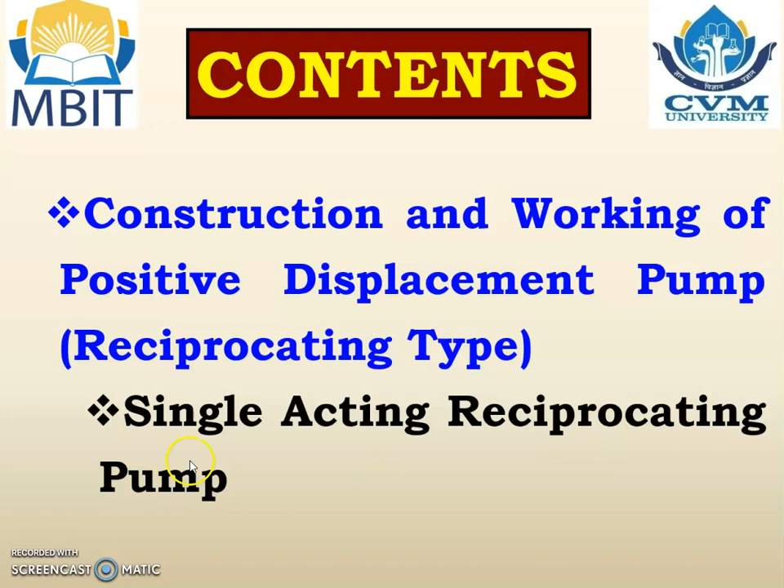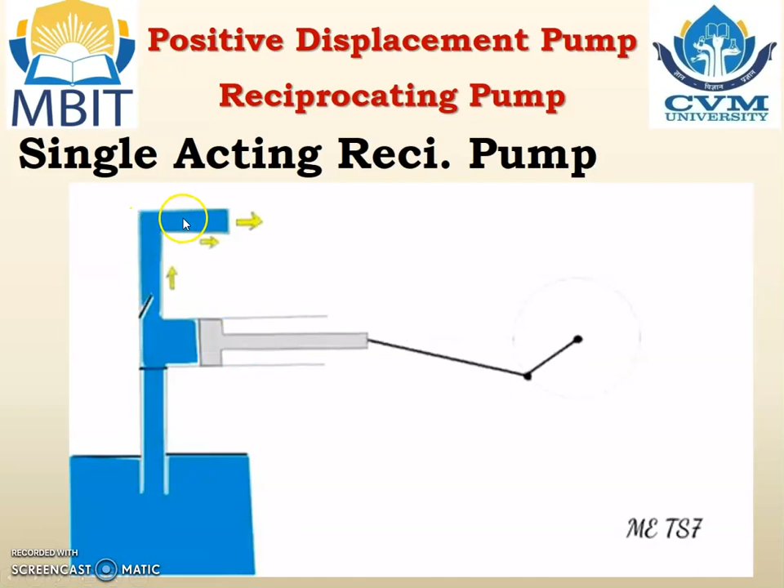Before we study the single acting reciprocating pump, let us study the animations on the single acting reciprocating pumps. Here you can see the piston moves from left hand side to right hand side. During that time, water is lifted up to the piston, and when the piston moves back from right hand side to left hand side, the water lifted or available in the cylinder is now lifted to the overhead tank.

The same animation is here. When the piston moves from right hand side to left hand side, water is lifted up to the cylinder level, and when the piston moves from left hand side to right hand side, the water is lifted from the cylinder level to the discharge level.

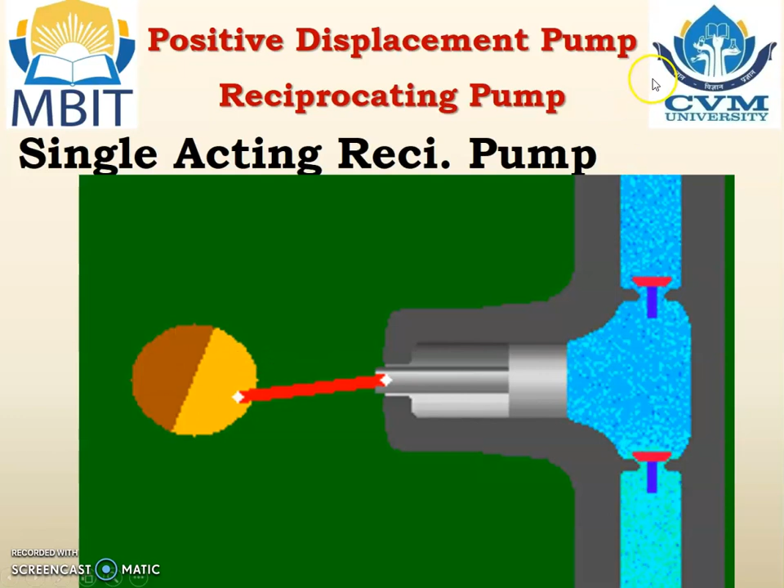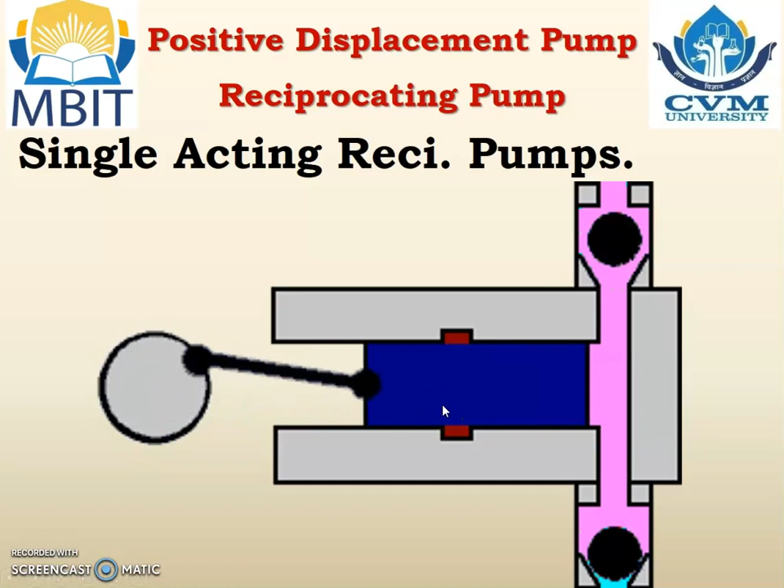This is another animation. Water is sucked and then water is lifted. This is another animation we can see. So in all these animations we can see there is a reciprocating motion, and so it is known as the reciprocating type pump.

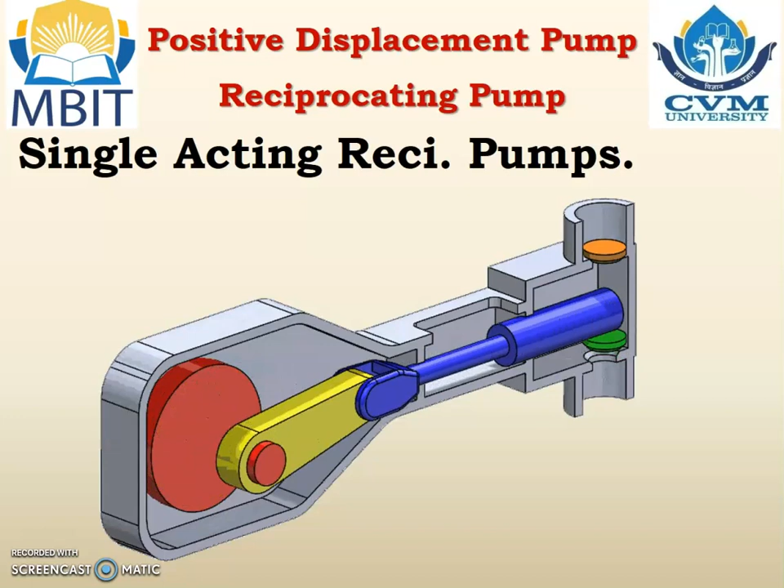This is another animation, and this is the figure which you are required to draw if they ask you in the examination.

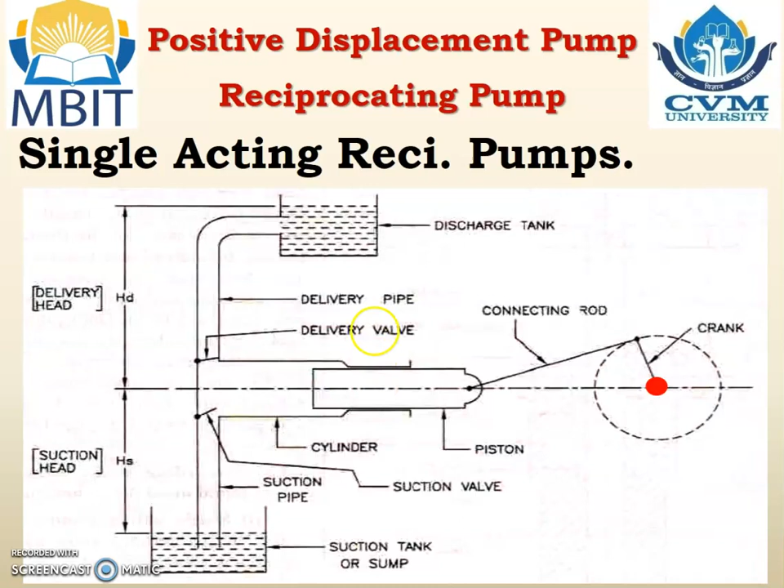So now let us see the different parts of the single acting reciprocating pump and its working. Construction: it contains a fixed cylinder in which the piston reciprocates. This one is the fixed cylinder in which the piston reciprocates.

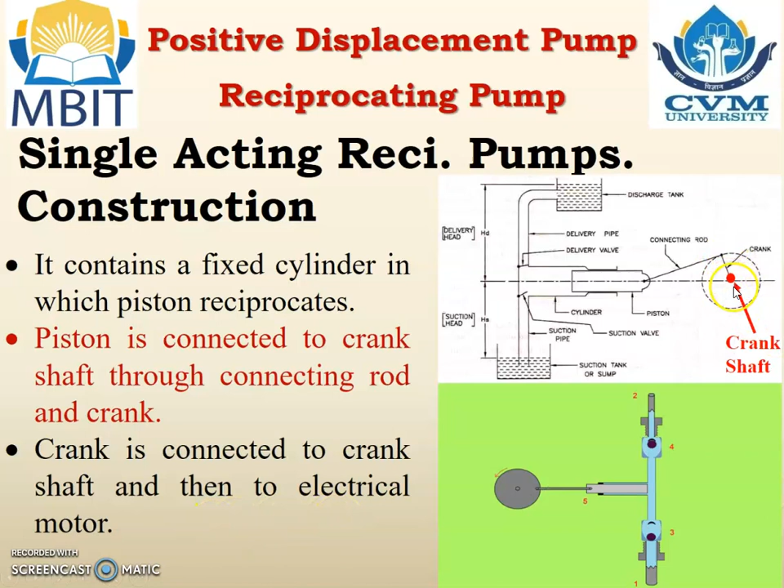The piston is connected to the crankshaft through the connecting rod and crank. So this piston is connected to the connecting rod, then to the crank, and then to the crankshaft. Crank is connected to the crankshaft and then to the electric motor, meaning crankshaft is connected to the electric motor.

The suction pipe connects the cylinder with the sump, and the discharge pipe connects the cylinder with the overhead tank. So this one is the suction pipe, connecting the sump level with the cylinder level, and this is the discharge pipe or delivery pipe, connected between the cylinder and the discharge tank or overhead tank.

The suction valve and discharge valve are located in the suction pipe and discharge pipe respectively. Here is the suction valve located in the suction pipe, and this is the discharge valve located in the discharge pipe. Both valves are one-way valves, meaning non-return valves which allow the flow of liquid in one direction only.

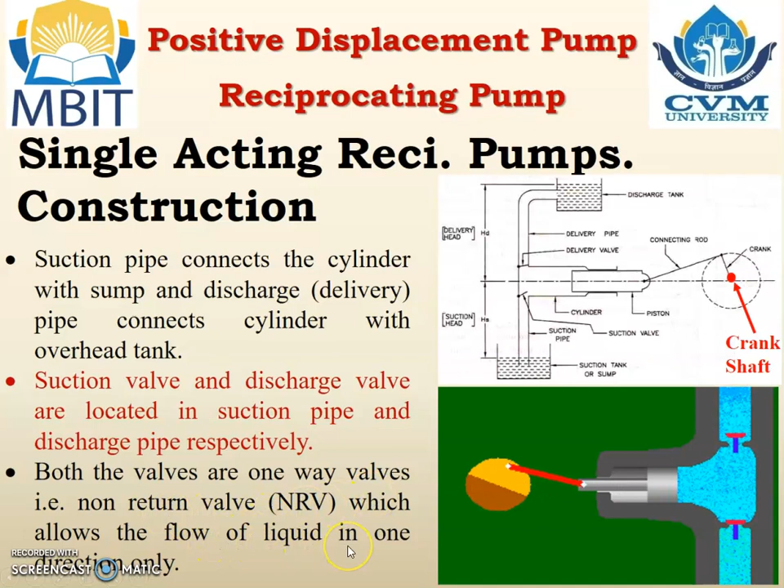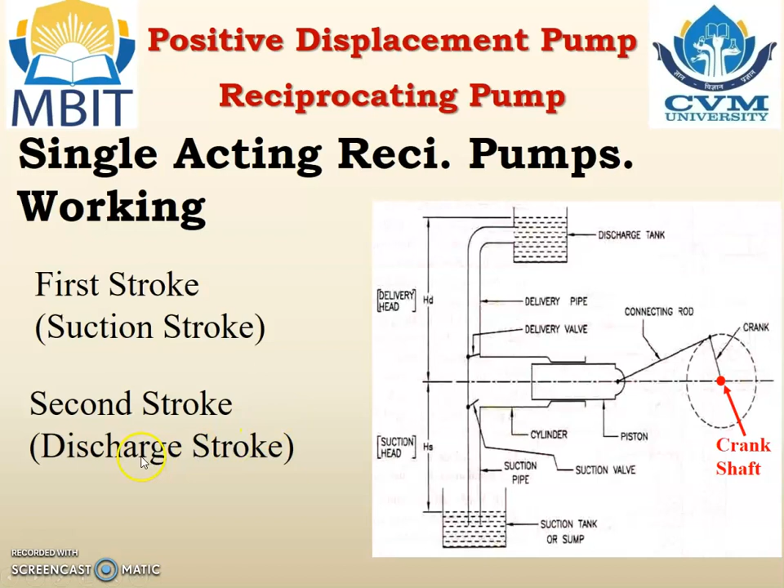Working: the working of the single acting reciprocating pump is divided into two strokes. The first stroke is known as the suction stroke, and the second is known as the discharge stroke. Let us study the first stroke, the suction stroke.

During that time, the electric motor is switched on. As the electric motor rotates, the crankshaft also rotates, since the crankshaft is connected to the electric motor. So as the electric motor is switched on and rotates, the crankshaft rotates, and due to that the crank also rotates.

Let us say that during the first stroke, the crankshaft rotates from 0 degree to 180 degree, meaning the crank rotates from 0 degree to 180 degree, and the piston reciprocates from the left hand side of the cylinder to the right hand side of the cylinder.

The piston moves from left hand side to right hand side. Due to movement of the piston, partial vacuum is created, and due to that the suction valve opens and water from the sump level enters into the cylinder. As the piston moves from left to right, vacuum is created inside the cylinder, and due to that the suction valve opens and water is lifted from the sump level to the cylinder level.

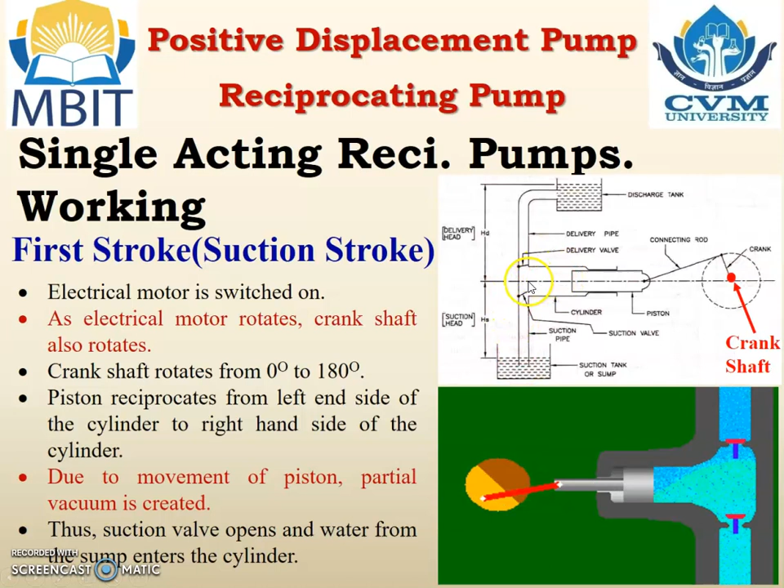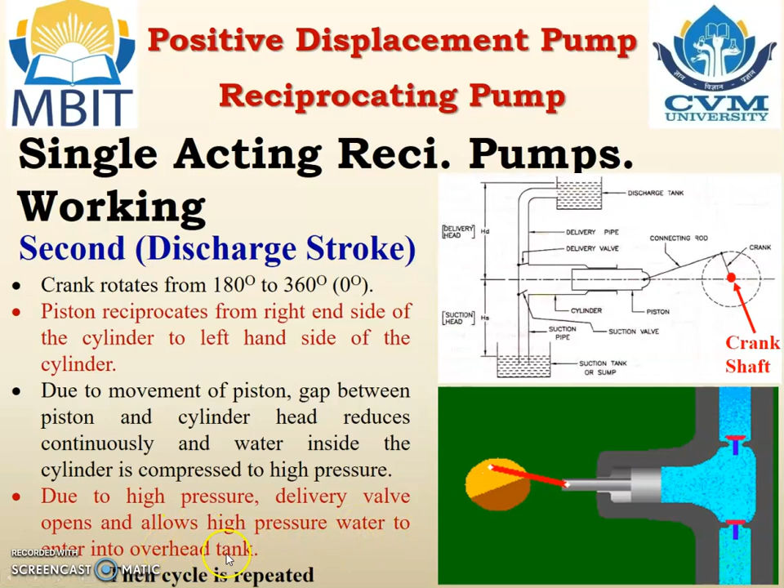Second stroke is known as the discharge stroke. Crank rotates from 180 degree to 360 degree. Piston reciprocates from the right hand side of the cylinder to the left hand side. Due to movement of the piston, the gap between the piston and cylinder head reduces continuously. As the piston moves from right to left, the gap reduces, and due to that, water inside the cylinder is compressed to high pressure. Due to high pressure, the delivery valve opens and allows the high pressure water to enter into the overhead tank, and this cycle is repeated.

Thus, during the suction stroke, only water is filled inside the cylinder, and during the discharge stroke, only water is lifted to the overhead tank. It means we are getting water at the discharge tank or overhead tank during one stroke only, that is the discharge stroke. Discharge of water to the overhead tank is available only during the discharge stroke. Thus, this type of pump provides the discharge intermittently, not continuously.

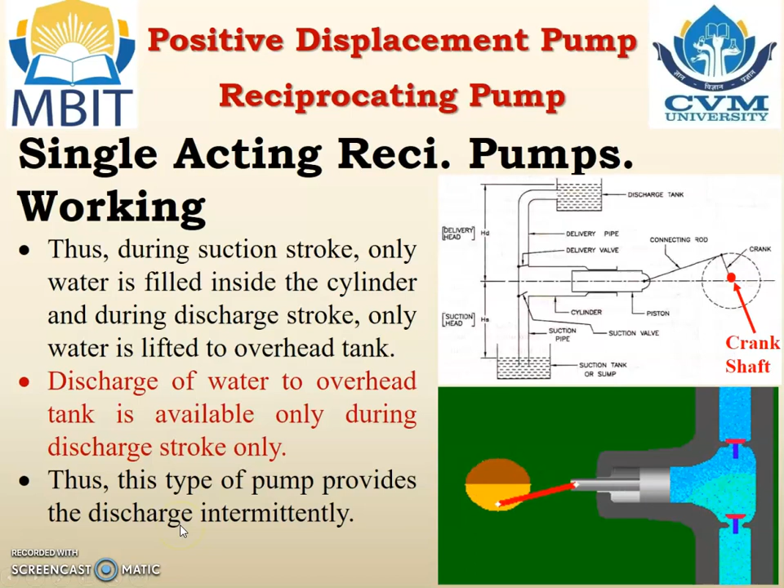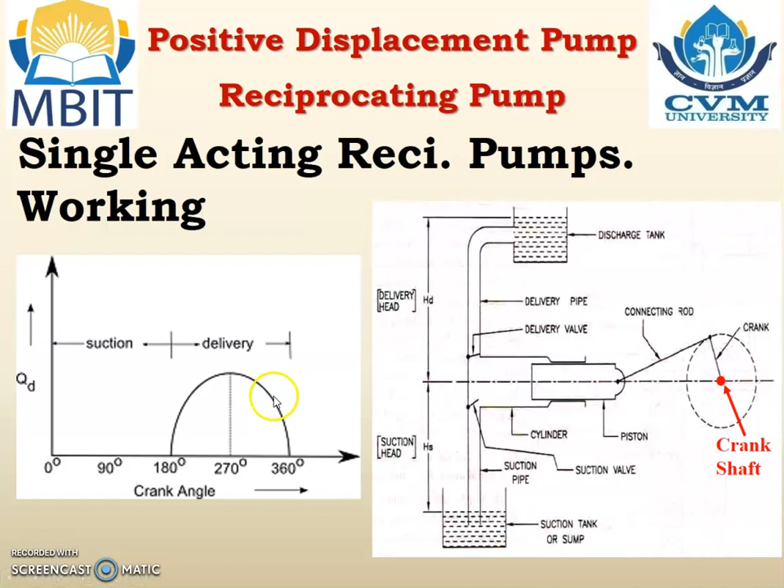In this type of pump, the width or length of the reciprocating member is less than the stroke length or cylinder length. Now why is it known as the piston? The piston is nothing but the reciprocating member, and as the length or width of the reciprocating member is less than the stroke length of the cylinder, the reciprocating member is known as the piston, and so the pump is known as the piston pump.

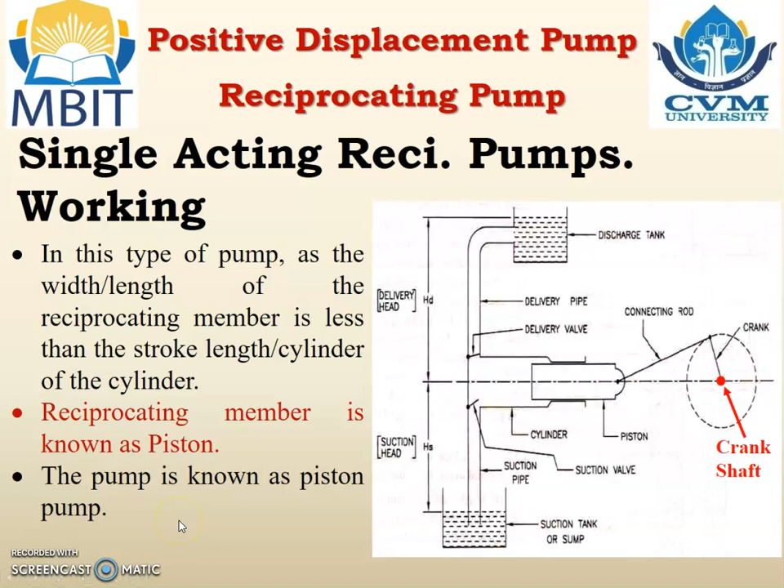In this type of pump, water is in contact with only one side of the piston. This is the left hand side of the piston, this is the right hand side of the piston, and the water is in contact with only the left hand side of the piston, and due to that it is known as the single acting pump. If water is in contact with both sides of the piston, it means water is in contact with the left hand side as well as the right hand side of the piston, then it is known as the double acting pump. But this is the single acting pump.